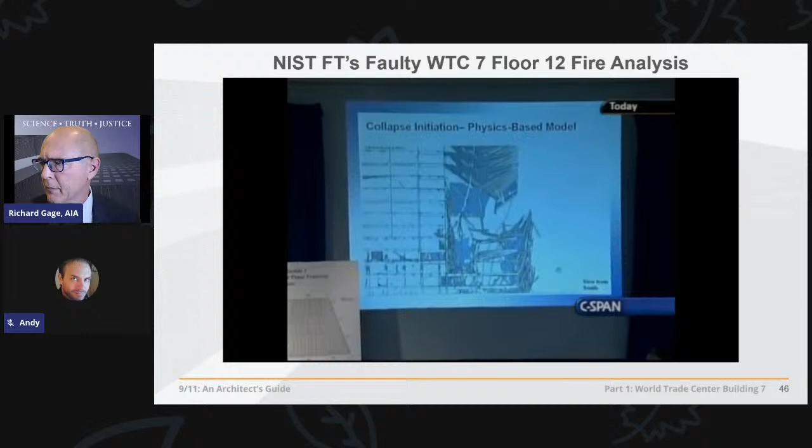All right, so I'll show you this video again here. Come on, there we are. And you can see on the screen, the column at the very right is column 79, and that's the column that first buckles, causing the floors to come down, followed by a quick succession of failures of adjoining columns. Now, all of that is going on the inside of the building. Let's break it down. We have column 79, a massive column, 700 pounds per foot of length on it. This is the floor where their fires are said to have been blazing.

What they said is eventually it caused these beams to expand linearly, pushing this girder off of its seat on this column 79. Then floor 13 falls on floor 12 after that girder falls off, and floor 12 on floor 11, and so on for 9 floors, leaving column 79 unbraced, so that it just buckles, and the entire series of floors fail all the way up to the east penthouse. There are a number of problems with this, but let's take them one by one.

The expanding columns - well, the fires were out here over an hour and a half prior to the collapse of anything, so those fires could not have been expanding these columns at or near the time of the collapse at all. Also, they put into their computer model, in just a second and a half, all of the heat of those fires - 1600 degree fires, something like that they were claiming.

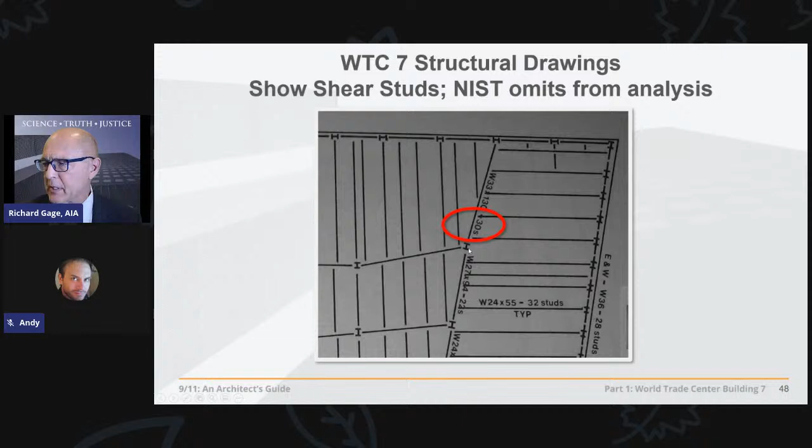We have then the beams breaking their shear studs, which they say were on these beams, but then that pushes the girder off of its seat, because apparently it did not have shear studs, according to NIST. However, the shop drawings show that this girder clearly does have 30 shear studs, so it couldn't have gone anywhere, much less being pushed off of its seat on this column 79 by these beams here, which are 50 feet in length.

But let's say that could have happened, and this girder could have been pushed off of its seat. You see the seat blown up here. NIST says it only had to be pushed halfway off of its seat on this column, because this flange then just had to fold and break. But the problem there is that flange is supported by these 3/4 inch stiffeners, which are welded in place. You see here in elevation and here in plan.

So NIST omits that key structural component, citing that they didn't have to put that stiffener in there because it was only there in order to keep the web from crippling or bending. And that also would have clearly supported the flange on top of that seat from folding. So indeed, that girder would have had to have pushed all the way off of its seat.

Anyway, even if that happened and this girder fell off of its seat, floor 13 couldn't have just fallen on floor 12. There's two other massive girders framing into that column - it would have kept most of that floor intact. And even this section of floor 13 could have fallen, it wouldn't even probably have reached the floor below.

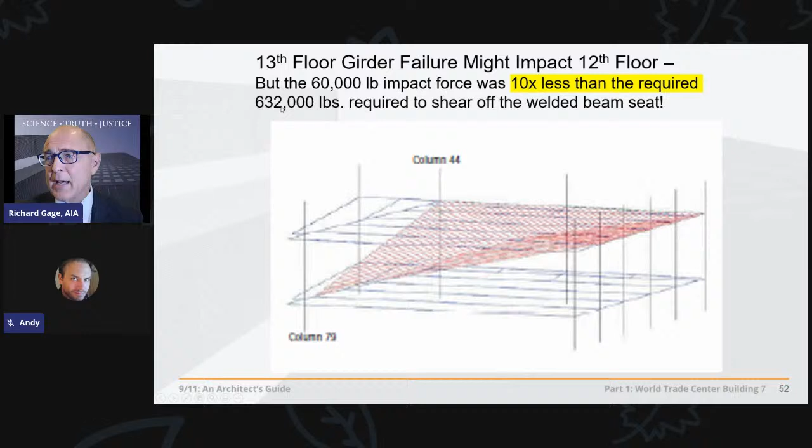Much less had the shear strength to break the shear on that, because it would have taken 10 times the amount of dynamic force to break that connection on the girder connection to the column below. It would have taken 632,000 pounds, but it only had 60,000 pounds.

So this is all extremely important, but let's go further and say that floor could have fallen and that there was this internal cascading failure of these floors per NIST's computer animation. Well, then you would have seen massive breaking up of structural steel framing members on the perimeter.

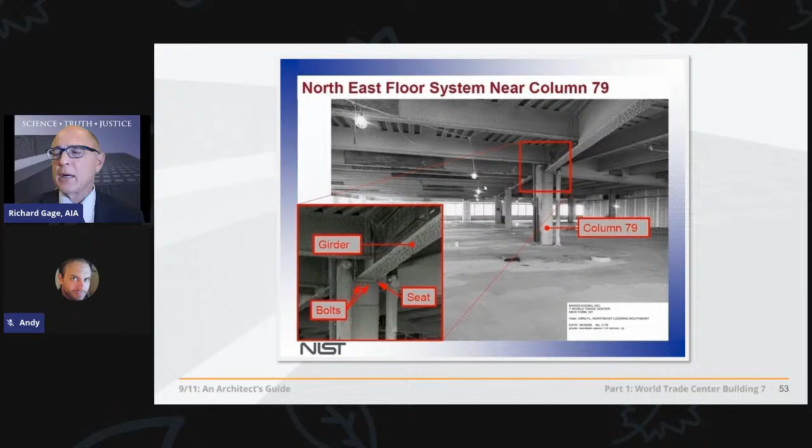And because all of these beams are very carefully designed to be interlocked in this moment-resisting steel frame structure, you would have had breaking up of windows and granite panels on the exterior in an incredible way. It would have been crumpling up like a beer can right here on all of these floors below the east penthouse. But that's not what happens in reality, as you saw in the video.

Why? Well, it begins to tip over. They can't even fake their computer model enough to get it to look like the video. It begins to crumple up on the lower floors, as you'd expect in any structural failure that's involving the lower floors of a high-rise. So we submitted a FOIA request, Freedom of Information Act, which you can do with federal agencies in the U.S.

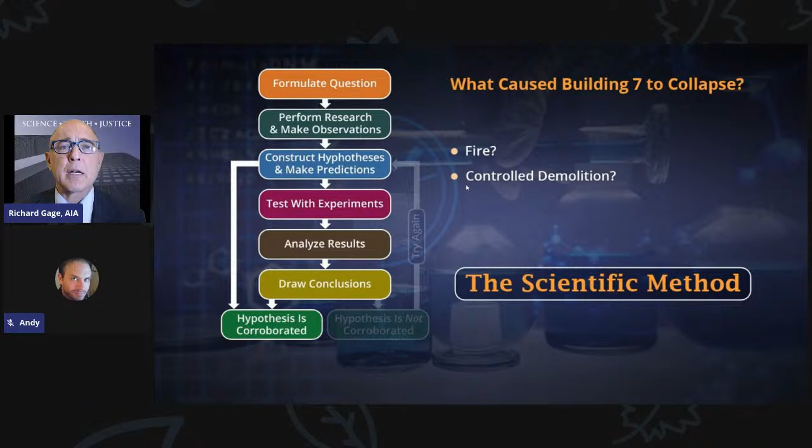If the hypothesis is not corroborated, we go back. We construct a new hypothesis until we have a hypothesis that's corroborated by all the data, the evidence, and so forth. That's what we're about today. That's what we're going to be doing. Let's start with some background research.

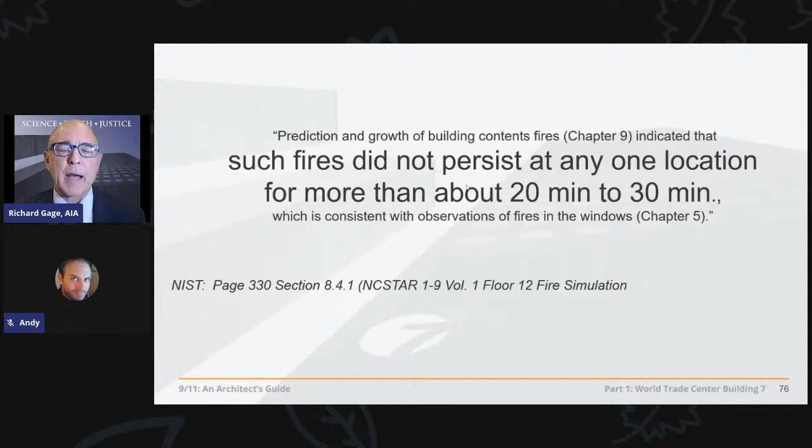Forces that destroy buildings, let's look at them. Fire is certainly one of them. Let's start there. It's an organic, chaotic process. It burns out an area in roughly 20 or 30 minutes and moves on looking for fresh new fuel sources. So even NIST acknowledges that fires can only persist in one location for about 20 to 30 minutes, and fires, by their nature, creep from place to place as they run out of fuel.

But how about that in a wood frame building? Because in wood frame buildings, you'd expect it not to fall straight down through the path of greatest resistance, the thousands of tons of structure, if there's that much there, of cold, hard, intact structure. It wouldn't just go straight down through - it might fall over. How about high rises? How do they act in massive fires?

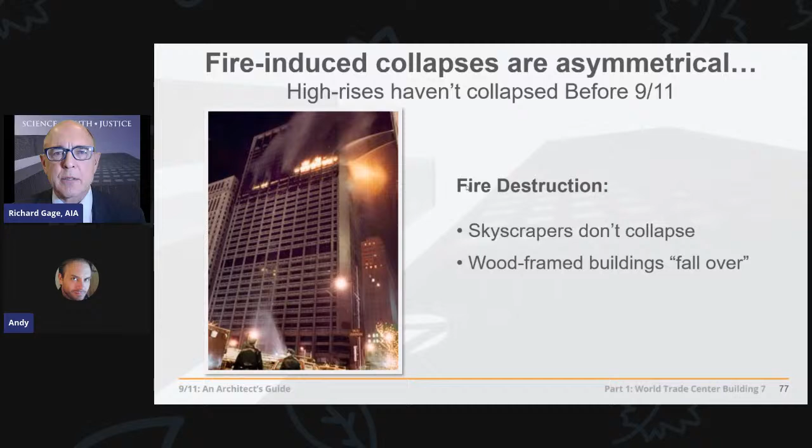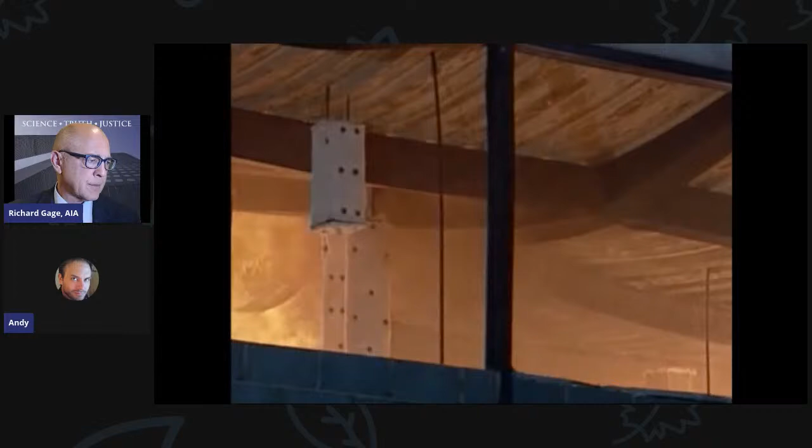It showed how unprotected steel can be distorted even by a normal office fire, but as is typical in steel buildings, the structural beams only slowly and progressively warped and sagged. There was no chance of a sudden collapse.

In over 20 years, I have not seen, until recently, a protected steel structure that has collapsed in a fire. Until recently - of course, he's referring here to 9/11, when we had not 2, but 3 protected steel structures collapse primarily due to fire, and in the case of Building 7, only due to fire.

But what happens with the connections? They remain intact - that's the strongest part of the building. The connections don't fail, the beams can sag. In this case, unprotected beams can sag or warp. They say in the executive summary, it's inherently stable due to the highly redundant nature of the structural steel form.

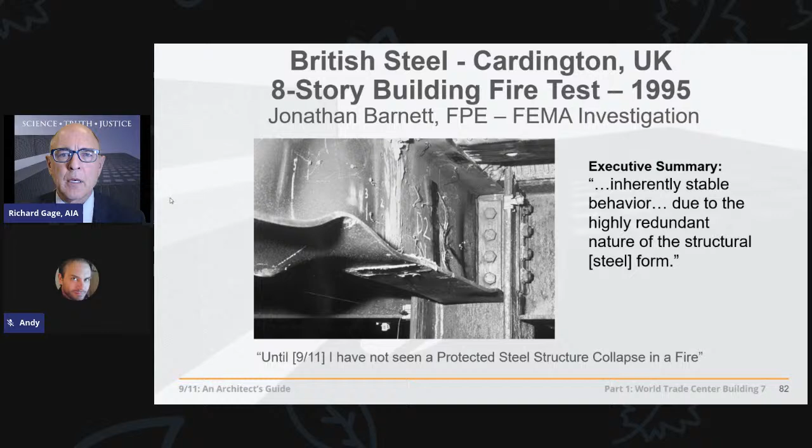Well, we've had almost 100 very hot, large, and long-lasting fires in skyscrapers in the US. Let's take a look at a couple of them.

May 4th, 1988, the First Interstate Bank, a 62-story building in Los Angeles, California, suffered a 3.5-hour fire which burned across 5 floors and caused an estimated $200 million of damage.

It did not collapse. February 23rd, 1991, the One Meridian Plaza, a 38-story building in Philadelphia, suffered an 18-hour fire which burned across 8 floors. The fire caused an estimated $100 million worth of damage and 3 firefighters died fighting it. It was later described by officials as the most significant fire of the century.

It did not collapse. October 17, 2004, the East Tower of the Park Central complex in Caracas, Venezuela, suffered a 17-hour fire which spread across 26 of its 56 floors. It did not collapse.

August 18, 2007, a fire broke out on the 17th floor of the Deutsche Bank building in New York, a building undergoing deconstruction after being heavily damaged by debris from the South Tower on 9/11. Originally 41 stories in height, it had been reduced to 26 at the time of the fire, which lasted 7 hours and affected a total of 10 floors. 2 firefighters died of smoke inhalation.

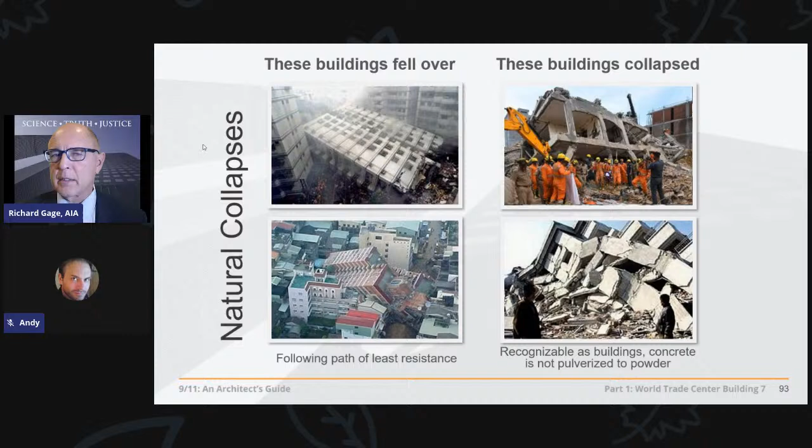The columns and the beams are not severed one from another. So remember that, because this is the kind of features that differ distinctly with the features of the collapse of buildings 1, 2, and 7. We're talking about 7 today. We have thick, billowing, enormous pyroclastic-like smoke in buildings that are exploded. The third category of failures here.

And we have sounds of explosions that are heard by witnesses, flashes of light that are seen by them. The explosions, due to the incredible hot gases, expand rapidly in cauliflower-shaped formation, and that's not typical even in buildings that fall over whatsoever, or buildings that are just on fire.

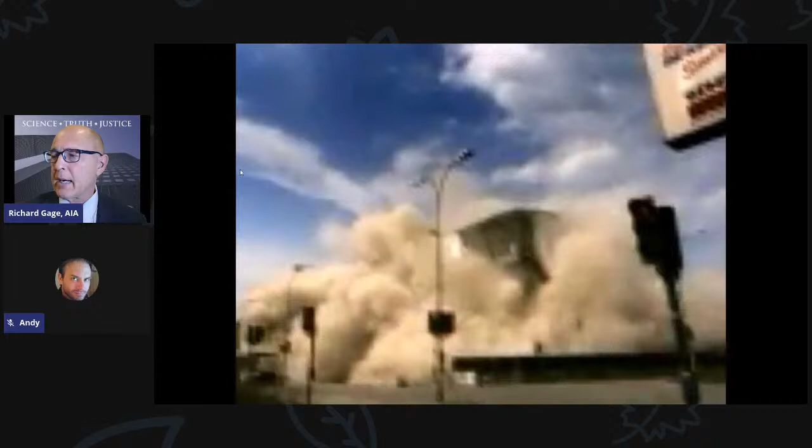And it's actually not true in most typical controlled demolitions. As you see here in these examples, there's a lot of dust because the concrete is broken up, and the gypsum board it's pulverized by lots of these explosions. But it's not this thick, billowing, rapidly expanding cauliflower-shaped forms, almost like in a volcano, which we'll be looking at a couple of examples of.

So they do this by placing shaped cutter charges at the column and beam connections throughout the building, and they set them off in a very precise order to bring the building down how they want.

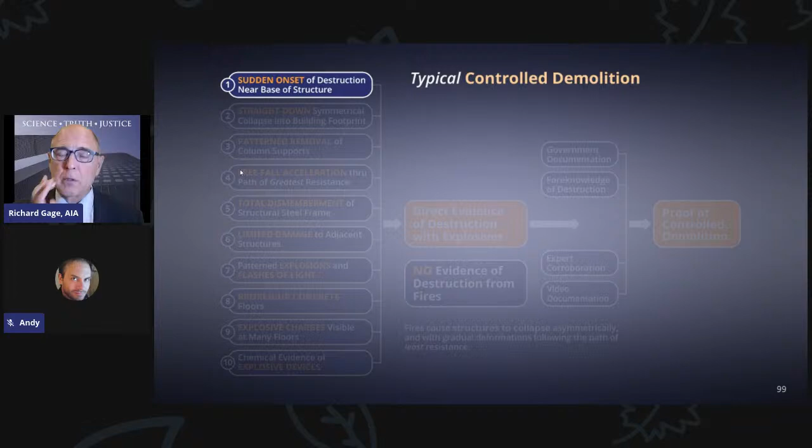There's a set of features associated with these controlled demolitions. There's a sudden onset of destruction. It doesn't begin to creak and groan and fall over. It's sudden, and it's straight down, symmetrical into its own footprint.

Feature number three, there's a patterned set of explosions. That's what causes feature number four, a free fall acceleration straight down through what was the path of greatest resistance, the thousands of tons of structure underneath, but which has been compromised by these explosions advancing ahead of the collapse, resulting in the total dismemberment of the structural steel frame.

So that is a key feature. They don't want to have to go back and break it up afterwards. They want to break up as much of it as they can, but at the same time cause as little damage to adjacent buildings as possible.

And then patterned explosions heard by witnesses. That's what we have here in the controlled demolition industry. Flashes of light seen by them.

The concrete floors are broken up. They don't want to have to go back and jackhammer those floors at all odd angles, one at a time. Extremely dangerous work. Let the explosives do that work. And so those explosions are visible at many of the floors as a result.

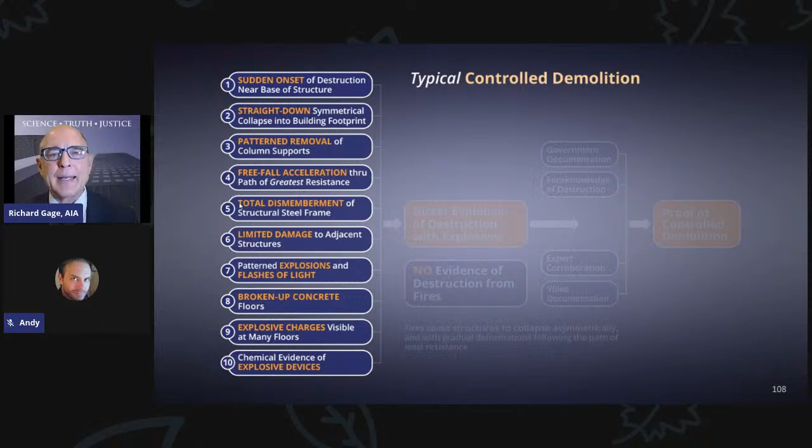And it leaves behind chemical evidence of explosive devices. If you have these features, you have explosive evidence of destruction, and evidence of explosive destruction. These features are not created by fire, let alone all of them. If you have all these features, you can be pretty sure that was a controlled demolition.

Fires cause less robust structures to collapse, but asymmetrically, following the path of least resistance, with gradual deformations.

With additional evidence, corroborative evidence, circumstantial evidence, like government documentation, that can be very, very helpful in determining what's a controlled demolition. You don't just go into a burning building and set these charges in an afternoon. It takes months and approvals. And so there's foreknowledge of the destruction.

Experts agreeing, at least those experts without financial or political obligations that might sway their objective opinion on whether something is a controlled demolition, along with video evidence we'll be looking at today, this is proof of controlled demolition, or can be. And such proof we're going to apply to Building 7 at this time. So let's get into it.

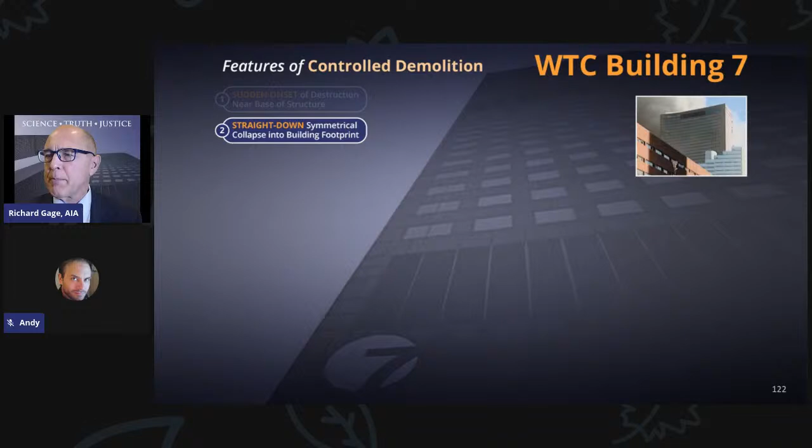Straight down, symmetrical collapse into the building's footprint. Is that what we have? Let's take a look from West Street. Pretty straight down, pretty symmetrical.

Also, you'll note the east penthouse is already collapsed. It was on the left side. And you also notice that half a second prior to the overall collapse of this building, the entire screen wall and west penthouse on the right falls down into the building, indicating that the structure beneath it failed virtually all at once.

Well, wait. NIST's theory is that after the east penthouse failed, that collapse went from left to right in 6 seconds, east to west. So we should have seen a gradual failure across this football field size building.

But they collapse all at once, completely pulling out yet again the rug from NIST, who claims that this was a gradual failure, instability from left to right.

And yes, it falls mostly into its own footprint, indicating, because the center of the pile is in the center of the building's footprint, that this was a symmetrical collapse. And maybe we're not quite sure yet.

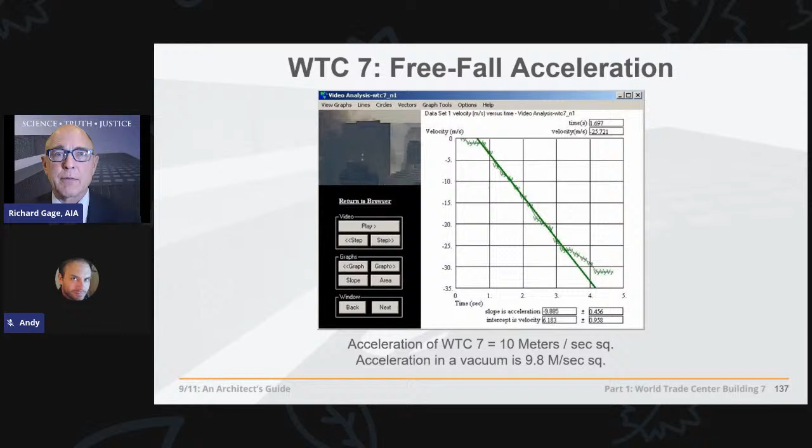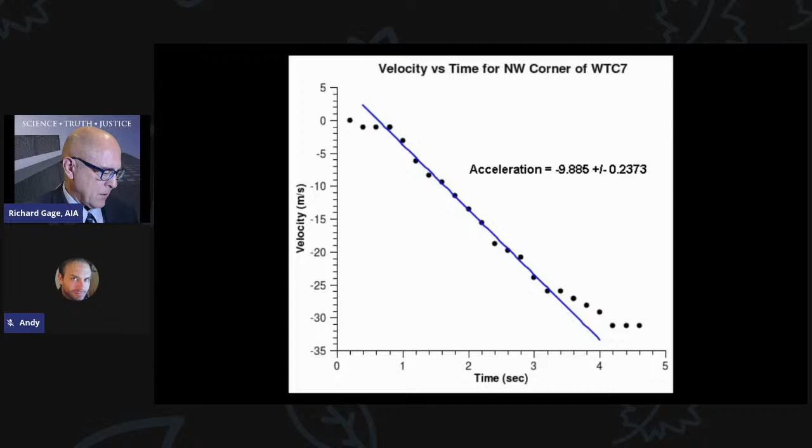How fast is the building coming down? Let's go to physics teacher David Chandler, who has a little physics lesson for us, high school physics. Just by watching it, anybody can see that building 7 fell close to free fall. To measure it, I used software to track the corner of the building and compute a graph of downward velocity as a function of time. The graph had a long, straight section indicating constant acceleration. Measuring the slope, I found the acceleration to be within 1% of the acceleration of gravity for the first 2.5 seconds. In other words, the building fell through its own structure with zero resistance.

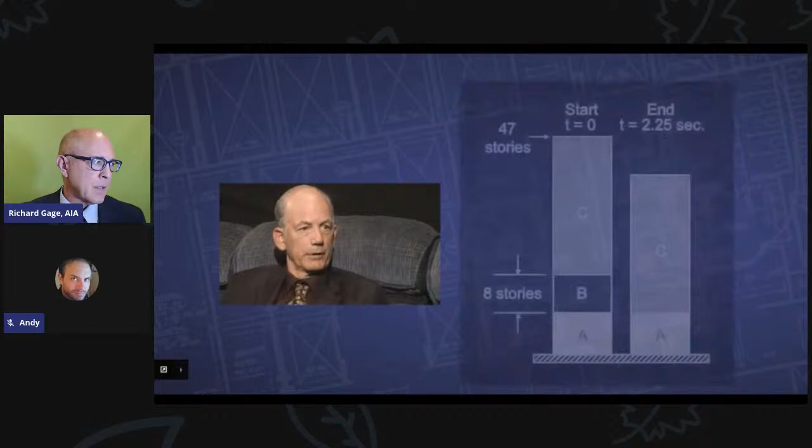Well, let's talk to some structural engineers about a building falling through its structure with zero resistance. This building had 40,000 tons of structural steel in its structural system, and that is intended to keep it from going anywhere. NIST is telling us that the building below it ceased to exist for the first few seconds of the collapse of the building.

Well, things in physics just don't cease to exist and cease to resist the forces that are on them. The building didn't disappear, so the building can't fall for 100 feet at free fall speed. That's impossible. That's a violation of the fundamental law of physics that says that for every action, there's an equal and opposite.

There is an equal and opposite reaction, and let's look at it. We have it over here. Reaction.

Hang on one second, I'll be right back. There we go. Oh man, place is falling apart today. Sometimes the green screen fails, and when it does, I have to set up a whole new background. Anyway,

Even when columns are buckled, they still provide resistance. 25% of their capacity remains intact even after they're buckled 90 degrees. So that means it's impossible for the building to fall at free fall speed, indicating not one of those columns gave any resistance.

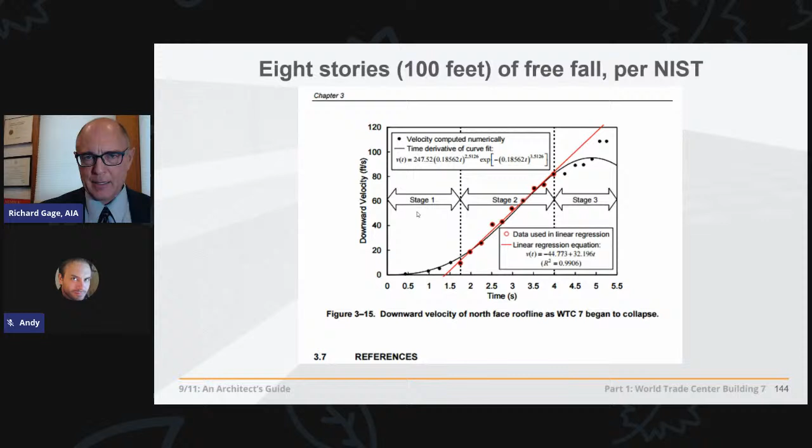Oh, NIST, in their infinite wisdom, says, oh, well, finally they admit that it did come down at free fall, but they simply say this is consistent with their existing results. Well, they were forced to admit free fall by members of AE 911 Truth who publicly embarrassed them into the reality that this is easily measurable.

Let's go on. Feature number 5. Is the structural system totally dismembered? Yeah, it falls like a house of cards. Every column from every beam has been completely severed. It's a moment resisting steel frame structure that has fallen like a house of cards.

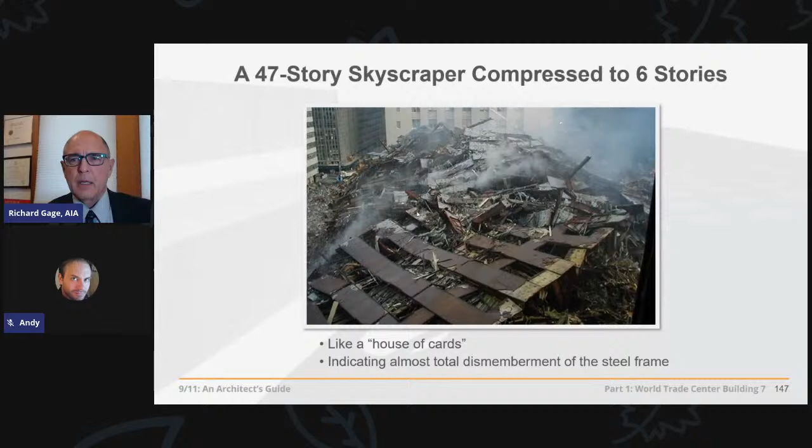The columns and beams are very rigidly welded to each other. They don't just break off like that. Remember, buildings that collapse due to natural causes, the columns and beams are not severed one from another.

The building is recognizable as a building, semi-intact at least. Do we have limited damage to adjacent structures? Yes, there's some damage to the post office across the street, but the center of the pile is in the center of the building's footprint.

Do we have sounds of explosions that are heard by witnesses? Let's go to Shyam Sunder first. We did not find any evidence that explosives were used in the collapse of Building 7. We ran down detailed computer simulations of blast scenarios. This size blast would have produced an incredibly loud sound that was not recorded on videos of the collapse, nor reported by witnesses.

No? Well, let's look at a couple of them. We were watching the building actually because it was on fire.

The bottom floors of the building were on fire, and we heard this sound that sounded like a clap of thunder. Turned around, we were shocked to see that it looked like there was a shock wave ripping through the building, and the windows all busted out. Then, it was horrifying.

And then, about a second later, the bottom floor caves out, and the building followed after that. We saw the building crash down all the way to the ground. A shock wave ripping through the building, the windows busting out. What does that sound like to you?

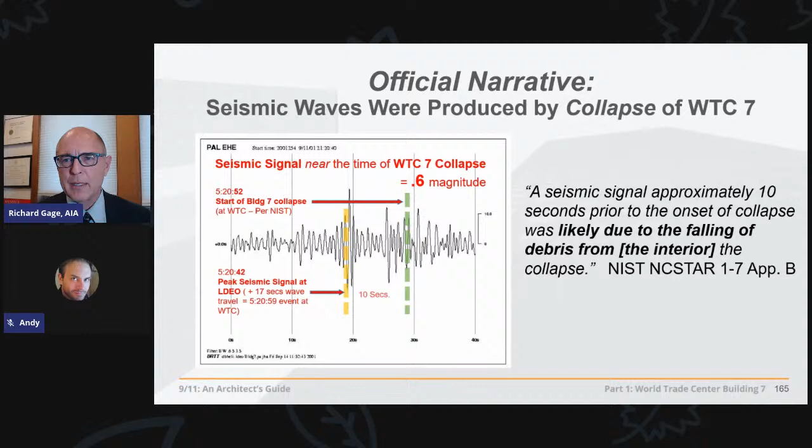Well, NIST has a way of making sense out of this. They say it's likely due to the falling of debris from the inside of the building. Well, that's only 10 seconds before, as you can see here. They're saying that's the falling of debris right now by that east penthouse, without any telegraphing, and the exterior perimeter structural steel system breaking up granite panels.

So 10 seconds before the overall collapse here, they're saying that signal, that peak signal, was caused by internal debris hitting the ground. And then virtually no seismic signals after that, not of that magnitude.

So Andre Rousseau comes into the picture in 2009 and 2012. We have this applied geophysics expert, author of more than 50 published papers on propagation of mechanical waves and geology. What does he say? Because he looks at this very carefully.

He says, gosh, the bell-like form points to an impulsive source of energy, not percussion on the ground due to the falling of debris. The seismic waves are only created by brief impulses, low frequencies. These undeniably have an explosive origin.

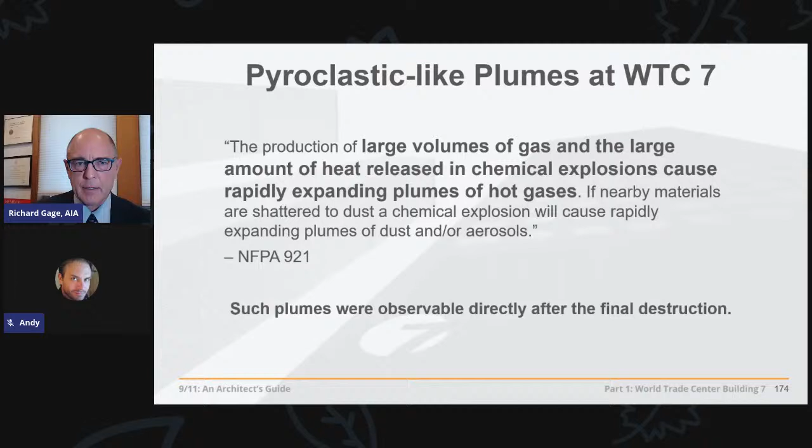So what I'm going to have to do is get my screen back so I can see what you're seeing. We're going to jump back to slide 174 and the slideshow there. Bring it back now from here. And there we go. So let's look and see if that's indeed what we have here.

Racing away from every direction from Building 7 at 35 miles an hour, these rapidly expanding plumes of hot gases - where is all that heat coming from? This is an incredible quantity of heat, and surely those few small and scattered fires in this building were extinguished by the kinetic energy of the building collapsing. We're talking about an order of this kind of heat. Where does that kind of heat come from?

Well, let's look into it, because we do find it. In fact, NASA finds it first from their infrared sensitive cameras. They're discovering heat on the surface of the pile, 1,340 degrees Fahrenheit. That's hotter than most office fires ever get, and yet surely those fires were extinguished, and there's no fire on the surface. So this must be evidence of something much hotter deep down in the pile that is radiating up to the surface and cooling off by the time it gets to the surface to 1,340 degrees Fahrenheit, which is hotter than most office fires get.

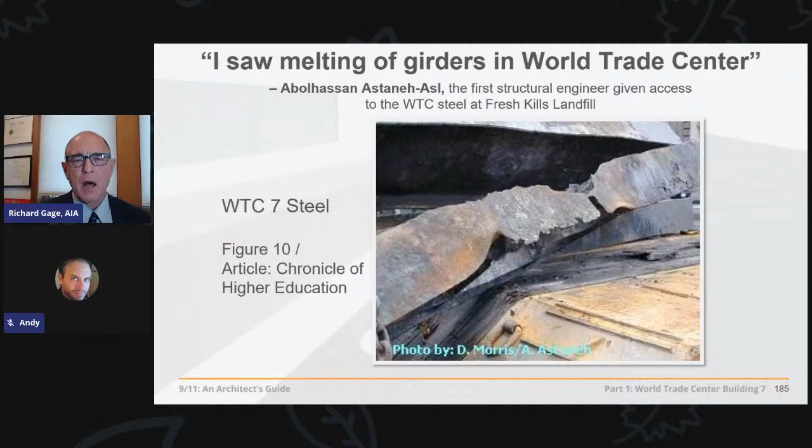So let's get into who's studying this steel. Here's structural engineer Abolhassan Astaneh-Asl. What does he say? 'I saw melting of girders, I saw melting of girders in World Trade Center.' Well wait a minute, girders don't melt in office fires. It takes 2,800 degrees to melt girders. These office fires were surely only 300 or 400 or 500 degrees. NIST claims 1,500 degrees - clearly that's less than half, or about half, of the temperatures required to cause this kind of melting on this piece of steel from World Trade Center 7.

What does FEMA report author Jonathan Barnett say about the steel members in the debris pile that appear to have been partly evaporated in extraordinarily high temperatures? He has no idea how that happened. It takes 4,000 degrees, by the way, to evaporate steel. What can do that?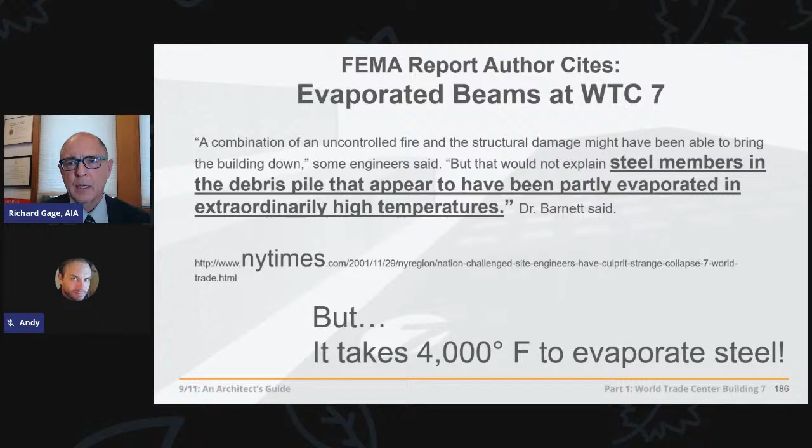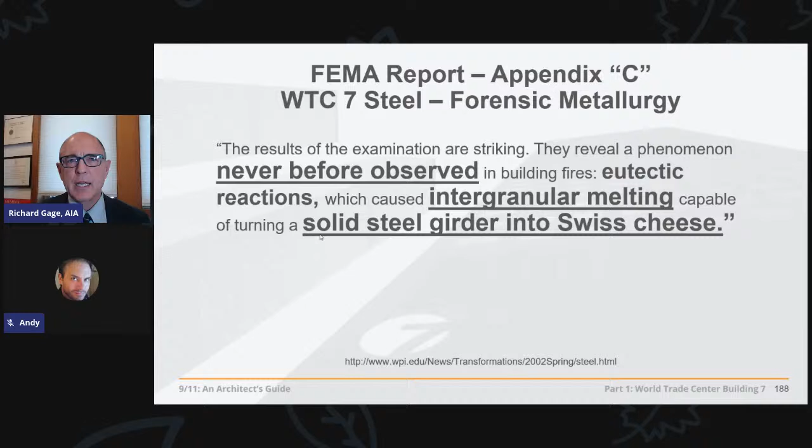Rapid oxidation, sulfidation - where did the sulfur come from? Liquid iron, that's molten iron. Iron doesn't even begin to melt until 2,800 degrees Fahrenheit. Sulfur formed during this hot corrosion attack on the steel.

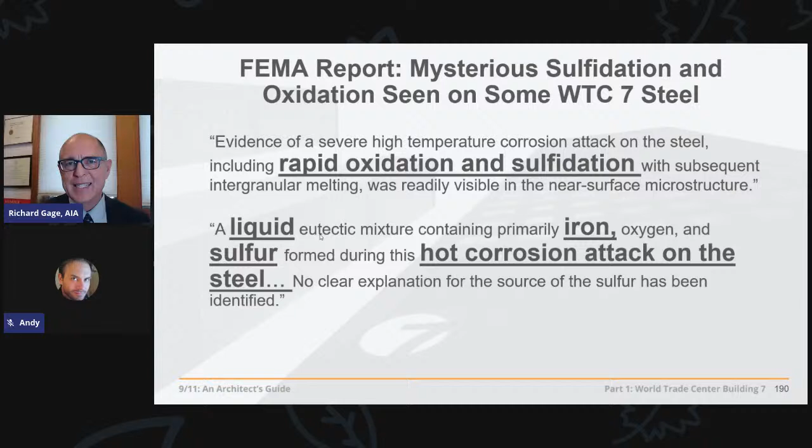Yet this information was completely eliminated from the NIST report when they took over in 2002, producing their own sanitized report, which we'll get into.

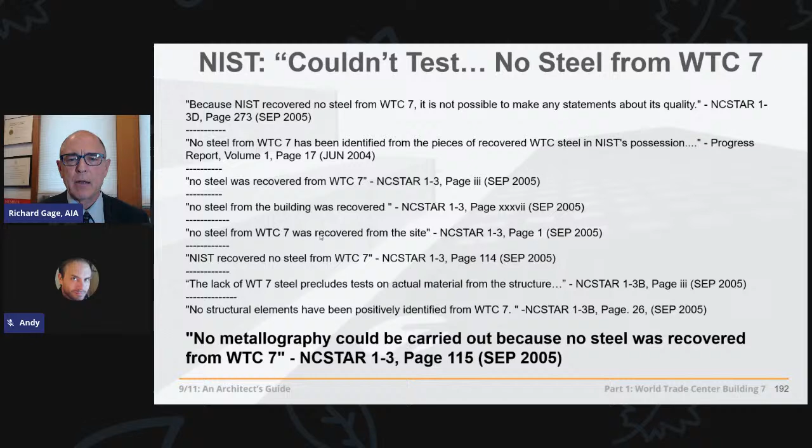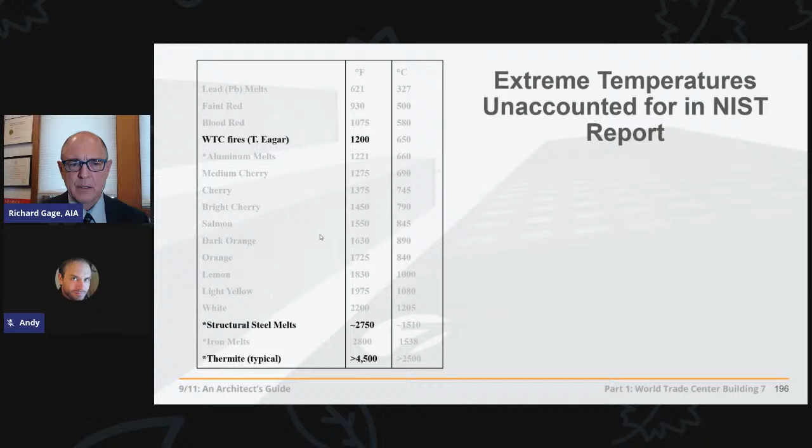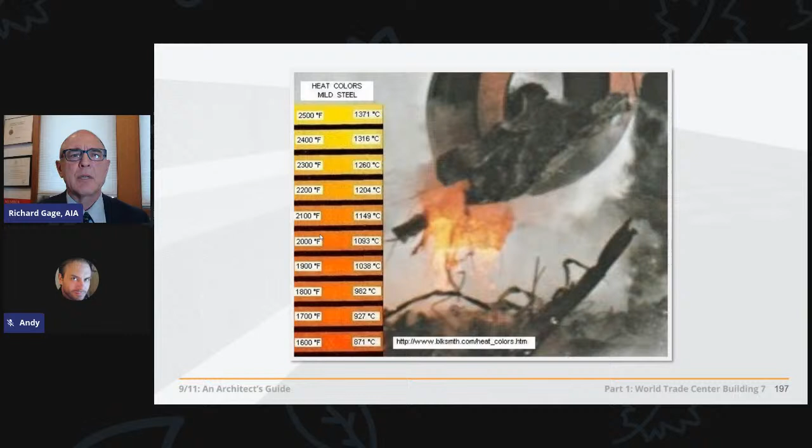The fires are maybe 1,200 degrees according to Thomas Eagar, but steel doesn't melt till almost 2,800 degrees. What could produce that? Well, buildings are hydrocarbons - they can only get to be about 600 to 1,400 degrees. Even jet fuel doesn't burn any hotter than that, according to its manufacturer. But there's no jet fuel at Building 7, right? Yet steel had definitely melted. In fact, you can see by the color of the material held in the hands of this crab claw excavator, the dripping molten white and yellow tells us, because of the physics of molten iron and steel, that it is 2,500 degrees.

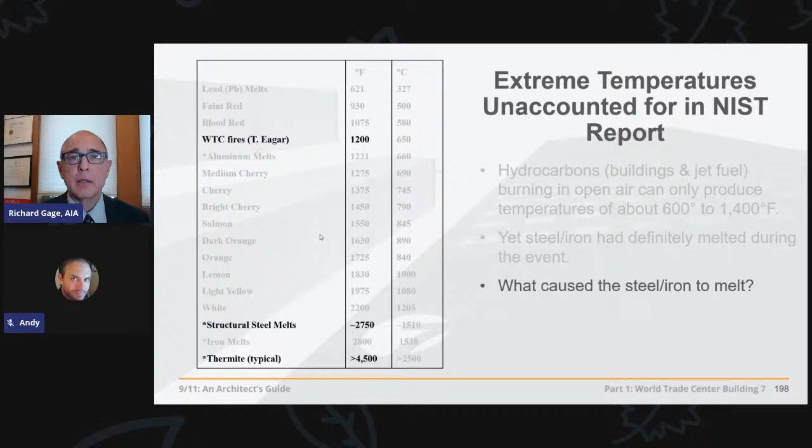What caused it to melt? Let's look at one reasonable hypothesis, which is thermite. As we look for forensic evidence of incendiaries here, could thermite have produced all that molten metal?

Well, what is thermite anyway? An incendiary used by the military, thermite is a compound of iron oxide and aluminum, which when ignited sustains an extreme heat reaction, creating molten iron. In just 2 seconds, thermite can reach temperatures over 4,500 degrees Fahrenheit, quite enough to liquefy steel.

We know that open-air fires cannot burn hot enough to melt steel, but metal had melted at the base of the towers. Appendix C of the FEMA report describes sulfur residues on the World Trade Center steel. The New York Times called this the deepest mystery of all. Sulfur slightly lowers the melting point of iron, and iron oxide and iron sulfide had formed on the surface of the structural steel. Sulfur used with thermite is called thermate, producing even faster results.

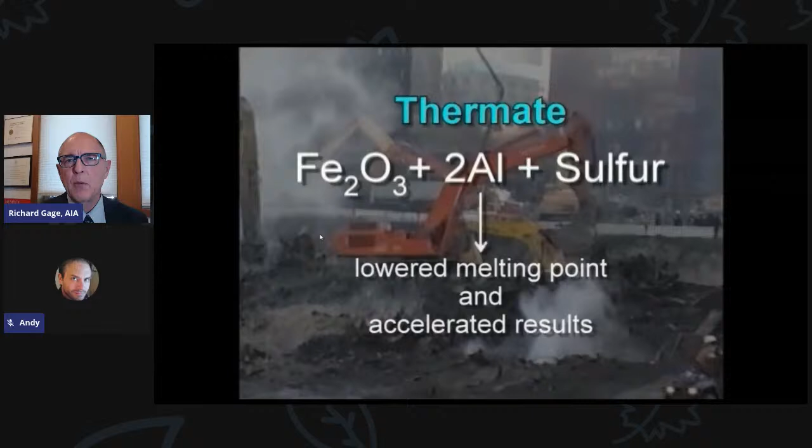Maybe we're getting somewhere here, because if thermite were used, then it would explain the presence of 4,000 degree heat, because that's what it produces. It would explain the presence of sulfur, because sulfur is added to thermite to become thermate, much more effective at cutting through steel. And it would explain the presence of molten iron, elemental iron that's been melted.

This is not steel that's been melted, interestingly enough. We haven't used elemental iron in our skyscrapers for 100 years. Where did the iron come from? We're going to see there's an awful lot of it in a moment.

The National Fire Protection Guide 921 says, look for unusual residues that could arise from thermite or other pyrotechnic materials. NIST says, we found no corroborating evidence to suggest that explosives were used. Later, a year later, they admit in writing, NIST did not test for the presence of explosive residue. You can't find what you won't look for, but others did.

One of them, Steven Jones, a nuclear physicist formerly from Brigham Young University, is sent a sample from this particular sculpture in the Peace Park in Manitoba. One of the things he notes is that this is a highly irregular cut through here. This isn't the kind of cut that they do with oxyacetylene torches and thermal lances.

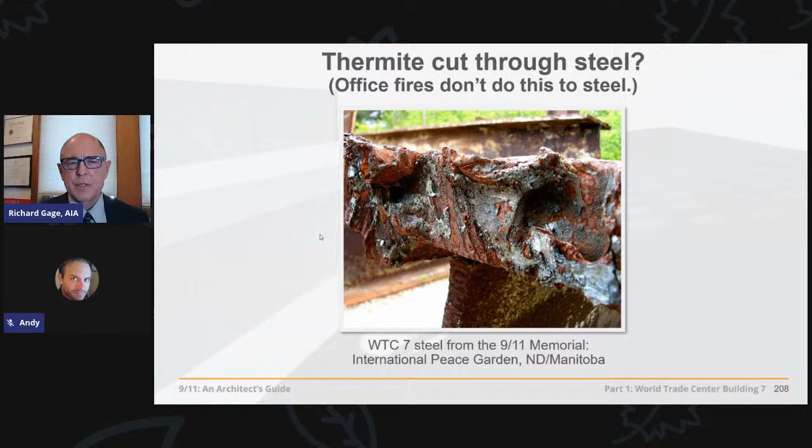So he takes a sample of this slag and he does X-ray energy dispersive spectroscopy and finds what? We have iron, key ingredient of thermite. Aluminum, key ingredient of thermite. And manganese, which becomes very important. And sulfur - again, there's that sulfur that nobody could identify from official sources.

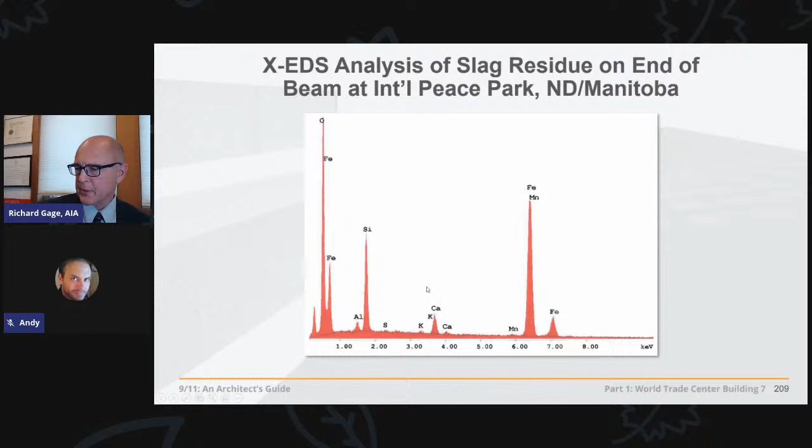Potassium. And we have some other studies that have been done by the U.S. Geological Survey - USGS. And all the dust samples, hundreds of them, they get very, very clear results from what's in them in their report in 2005.

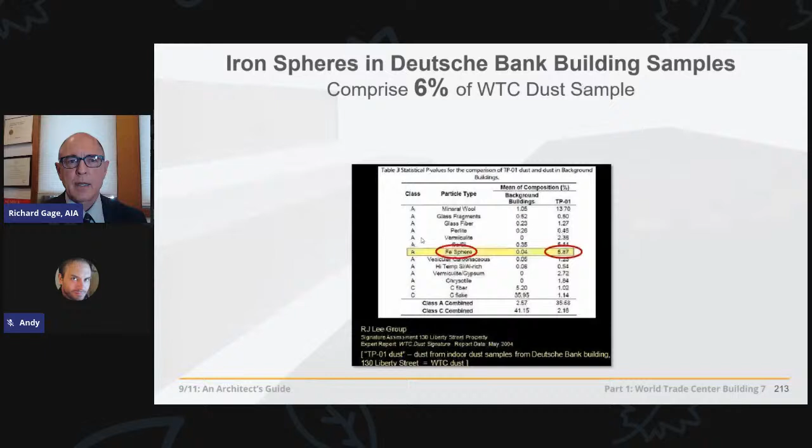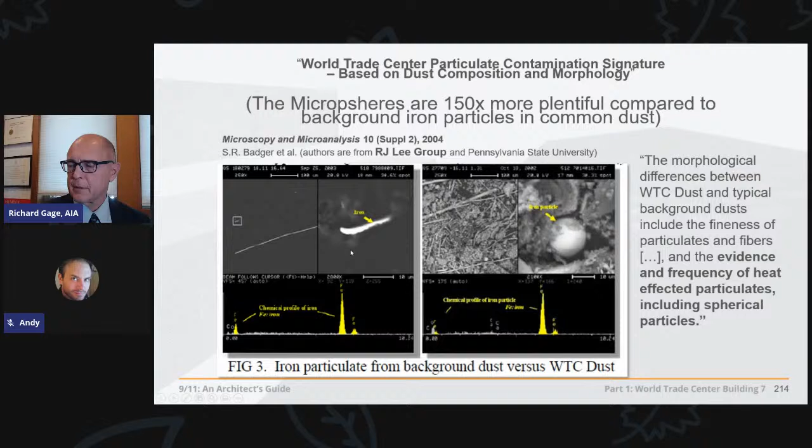They find billions of what? Previously molten iron microspheres. We're going to unpack that because they don't know where they came from. They have no idea. But all the dust samples have them. Up to 6% of these dust samples are composed of these iron spheres that they have no idea where they came from. There's up to 4 tons of this material in the dust - 150 times the background level of iron, which can be in common dust.

R.J. Lee Group finds them - an independent, private, environmental consulting firm. They said they're formed during the event, not before by the welders, not after by the iron workers taking apart the steel. Well, there's so many of them and they're so ubiquitous that the EPA designated them as a distinguishing element, a signature component to confirm what is World Trade Center dust and what is not.

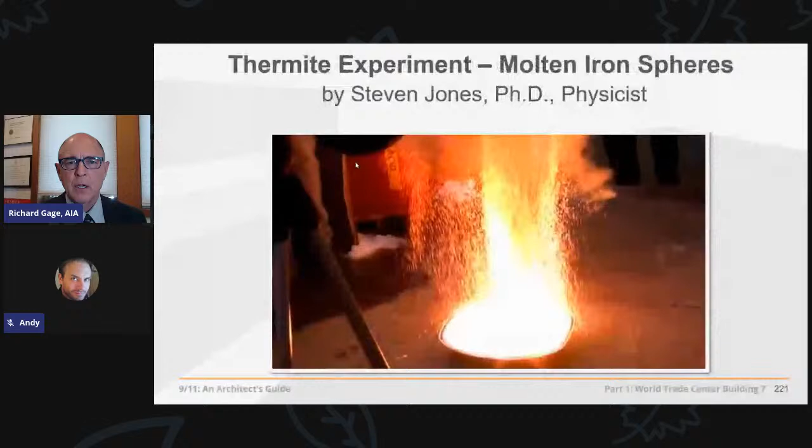Well, how would you make iron microspheres? Here's a thermite experiment under controlled conditions, a small one, where you see thousands of sparks - slowing it down halfway. What they look like is sparks, but they're liquid molten iron, which is what thermite issues under pressure, and that would form itself into spheres because aerosolized liquids do that due to their surface tension.

You can make thermite in your backyard, by the way. You could buy it on eBay. It's just iron oxide and aluminum powder. Iron oxide is basically rust and fine aluminum powders. Here's Jon Cole's experiment.

Don't try this at home. But if you do want to get into it, you'll find that there are much cleaner, more sophisticated devices that can cut through much thicker sections of structural steel more effectively.

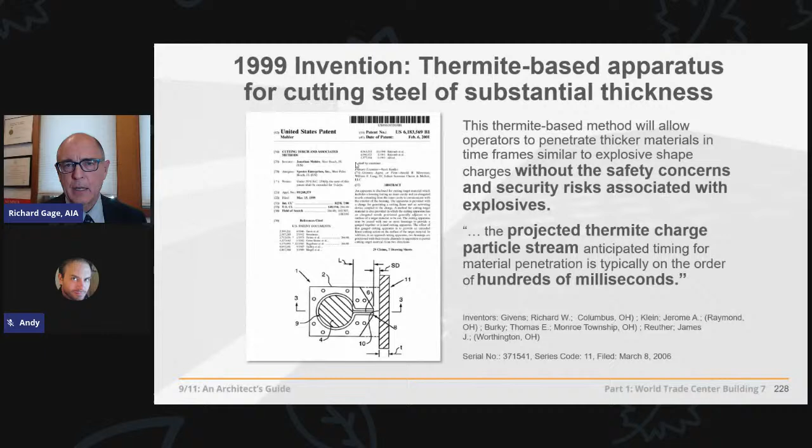And there are devices patented prior to 9/11 whose casings themselves are made up of consolidated thermite, which is consumed, but that would leave molten iron pools around for everybody to see.

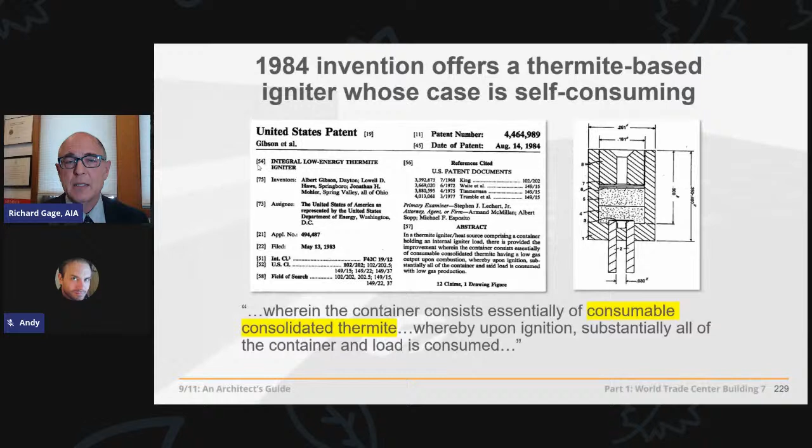And that's what we'll be showing you in week 3, part 3 of this 3-week series, 9/11 An Architect's Guide. This is just part 1.

But what else was found in the World Trade Center dust? Let's look into it, because a team of 8 international scientists led by Niels Harrit in Copenhagen collected samples from all over the place, including samples given to them because people had heard about their work.

Janette MacKinlay, for instance, collected some of the dust from her apartment across the street from the South Tower. This dust was blown into her apartment. All the windows were blown out in the building she was in. And she collected it. She was an artist, and she actually worked with it to make art projects, and ended up dying tragically of brain cancer several years later. She paid for that dearly, but one of these samples is hers.

These are red-gray chips, red on one side, gray on the other, which are found in all the World Trade Center samples that they collected. There's, by extrapolation, about 10 tons of this material in the World Trade Center dust.

They get real curious because it's attracted by a magnet, so it's not paint. And it's dual layered, red and gray. So it seems obvious that it was applied in a fluid such as paint. But they zoom in, and what do they find in the red layer? Iron oxide and aluminum powders, along with silica, oxygen, carbon, which we'll come back to.

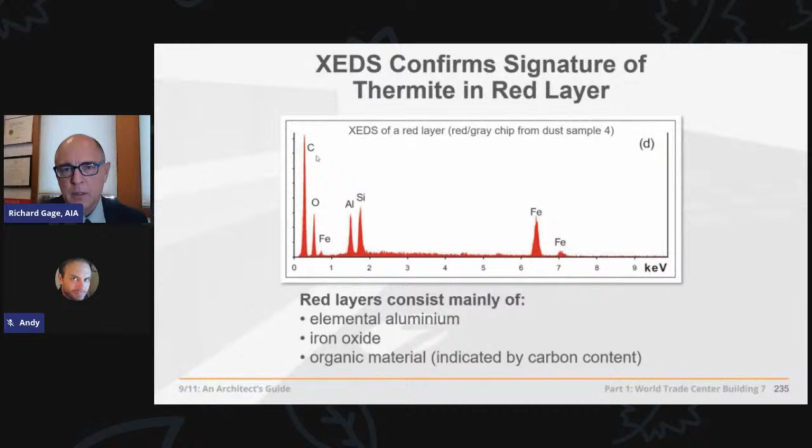So they get real curious. What are the ingredients of thermite doing in these red-gray chips? They zoom in 50,000 times with an electron microscope and discover nano-sized particles of iron oxide rhomboidal-shaped crystals and aluminum platelets. They're 1,000 times smaller than the diameter of a human hair. And they're set in a bed of oxygen, silica, carbon, organic materials.

Well, organic materials is what's used to expand and provide the incredible concussive force that's characteristic of TNT, RDX, C4, high energy explosives. So something very interesting is going on here.

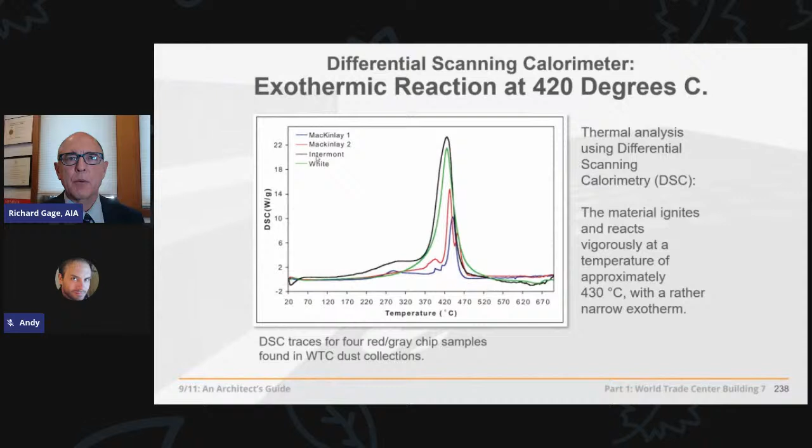Well, they put it in a heater, a differential scanning calorimeter, and it produces all this energy when it reaches about 430 degrees centigrade. And so they confirm that it's an exothermic reaction, which is what thermite does.

They also confirm that iron spheres are produced when they set them off in this heater, with the same chemical signature as the iron spheres produced in the World Trade Center dust. So you see, we know where these iron spheres came from that are throughout the World Trade Center dust.

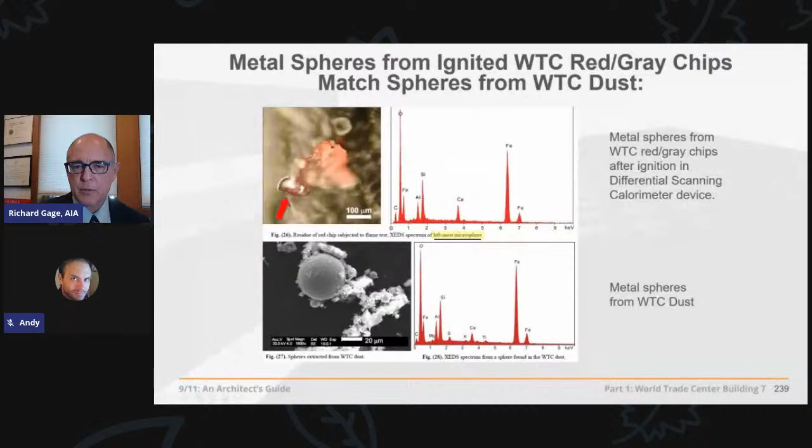As if we didn't know, they're found attached to partially ignited red-gray chips found in the World Trade Center samples, as you see here and here. So this is a self-corroborating, reproducible set of experimental data that can be used in a court of law to bring the real perpetrators of 9/11 to justice.

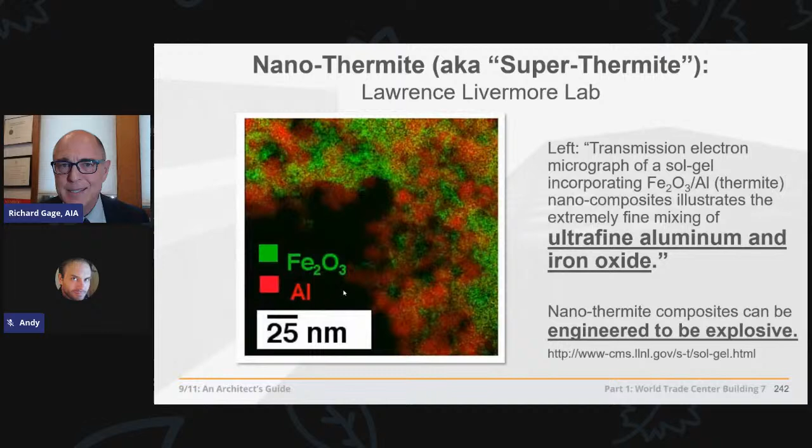So this is not made in a cave in Afghanistan. This is extremely sophisticated material. When you bring down to the nano scale these particles, the chemical reaction is virtually instantaneous. So you've turned, or engineered, an incendiary, which works by means of heat, to become more explosive.

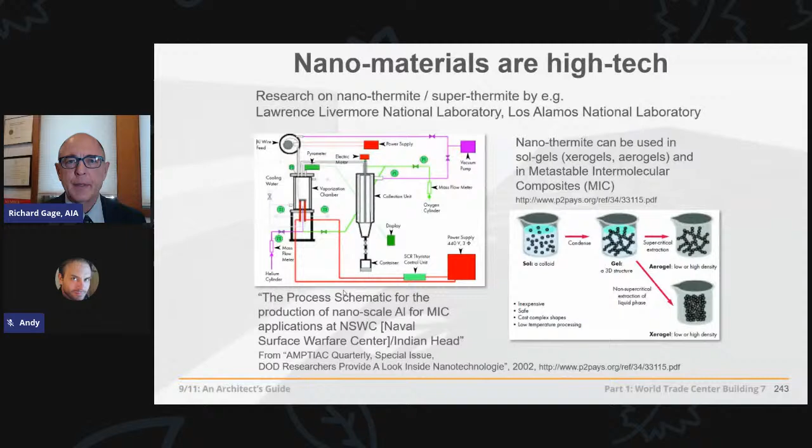It's not made by people who don't really know what they're doing. And it's not difficult to find the people that do. This is documented in a 25-page peer-reviewed paper in the Bentham Open Chemical Physics Journal.

The red layer is unreacted thermitic material incorporating nanotechnology. It's a highly energetic pyrotechnic material. This paper stands uncontested in the peer-reviewed literature.

The way to contest somebody's conspiracy theory, if you will, is to produce a paper of your own documenting what you believe to be the truth. And this has not been done, not for 10 years, since 2009. So what we've been looking at is direct evidence of destruction with explosives.

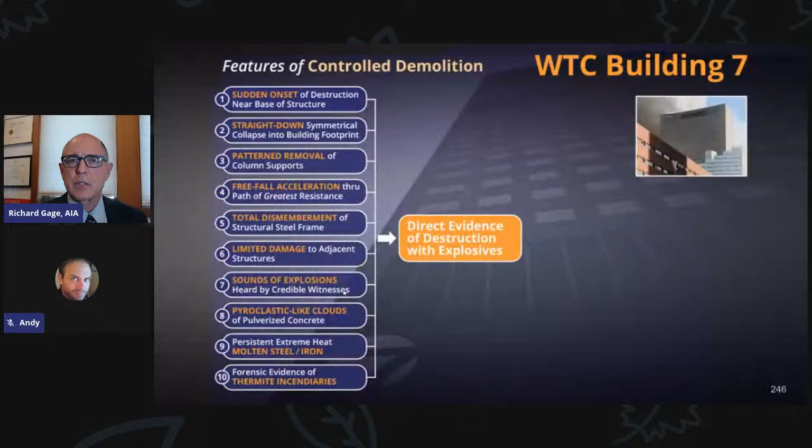A fire doesn't create these features, any of them, let alone all of them. With additional circumstantial corroborative testimony, which we'll be looking at.

Let's look at these fires first. Experts said no modern steel frame reinforced high-rise has ever collapsed due to an uncontrolled fire. Why did this one collapse? Well, we've kind of shown that, right?

But in terms of the actual fires in Building 7, the reason that we don't lose these skyscrapers is because the steel conducts that heat away. It's very conductive from its source, so the source never really gets to 1200 degrees, which is the temperature steel can begin to sag. It loses half of its strength at that temperature.

We don't want that to happen, so we fireproof the steel. And the steel in Building 7 was indeed fireproofed to code, providing 2 and 3 hour fire protection, which is 6 times the amount of protection it needs, because as NIST even acknowledged, fires only burn in one area for 20 to 30 minutes. They move on looking for a new fuel source.

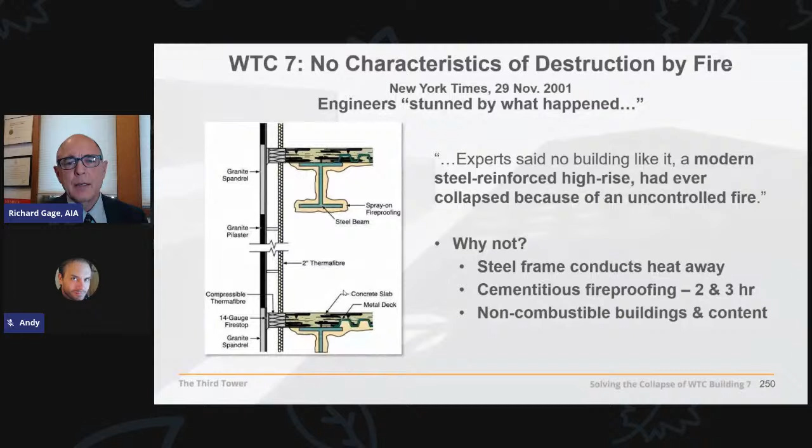So we also keep the tenants from bringing in huge fuel loads for the fire. You only have desks and chairs and rugs, paper. We don't allow contractors to build the high rises out of combustible materials in this country anyway.

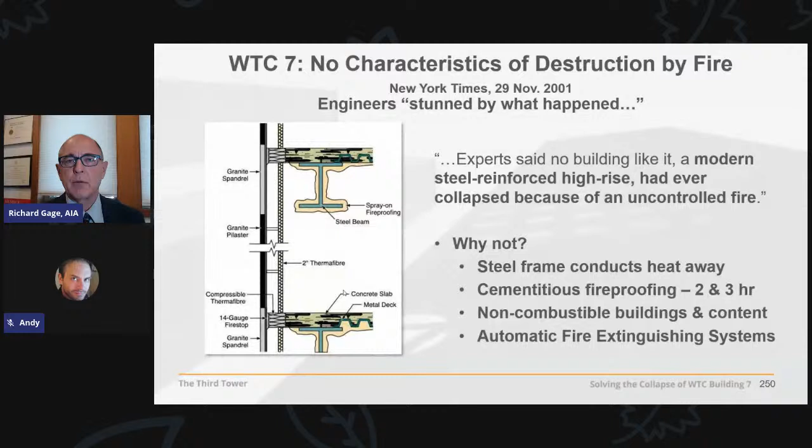And just to keep all that from becoming a problem, we put up fire extinguishing systems, which were put on test mode, as acknowledged by NIST, before 9/11. So they weren't even ever able to extinguish the fires that were in there. And even so, those fires did not get out of control.

As we'll go into some detail next week.

There were investigations into the collapse of Building 7. FEMA came along first with volunteers and finally got $600,000 worth of funding. Their efforts were hampered quite a bit, according to the New York Times. They couldn't get access to the blueprints, couldn't get access to the site, couldn't get access to the steel in any appreciable measure, nor could the public get photos and videos.

So along comes 2008, NIST's final report, and they launched their investigation with the stated conclusion that fires caused the collapse in 2002. So they weren't looking to what caused the collapse, even though FEMA had doubts about what really caused it. And they admit in 2006, we've had trouble getting a handle on Building 7.

FEMA produced the report that we looked at. What was their conclusion? Further research, investigation, and analysis are needed to resolve this issue. Hold on one second.

So surely we have preserved, in easily the most puzzling structural failure in modern history, Building 7. The evidence was preserved. No.

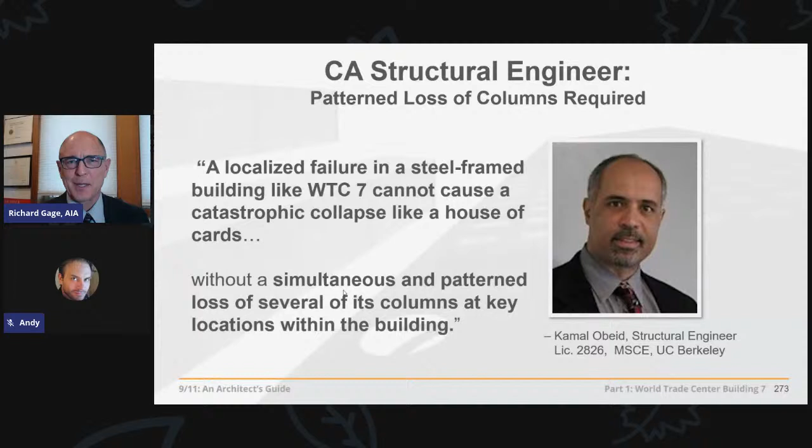One of 100 structural engineers signed on to our petition at AE 9/11 Truth, Kamal Obeid, states: a localized failure in a steel frame building like World Trade Center 7 cannot cause a catastrophic collapse like a house of cards without a simultaneous and patterned loss of several of its columns at key locations within the building. Does fire do that? No.

Prompting also the University of Alaska at Fairbanks to accept the challenge of studying this building's failure.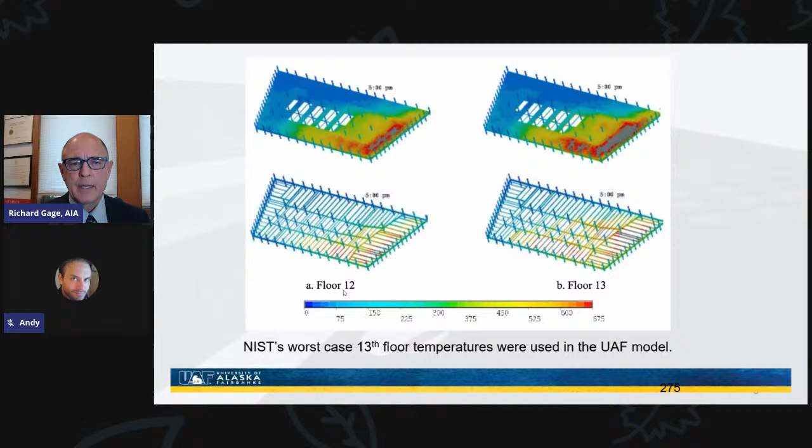Professor Leroy Hulsey, one of the top forensic structural engineers in the country, chairman of their environmental civil engineering, along with his PhD researchers, conducted a very detailed analysis over a period of 4 years. They start out saying, well, gosh, no other steel frame building had ever failed due to fire. We have to understand the failure mechanism here for the public safety.

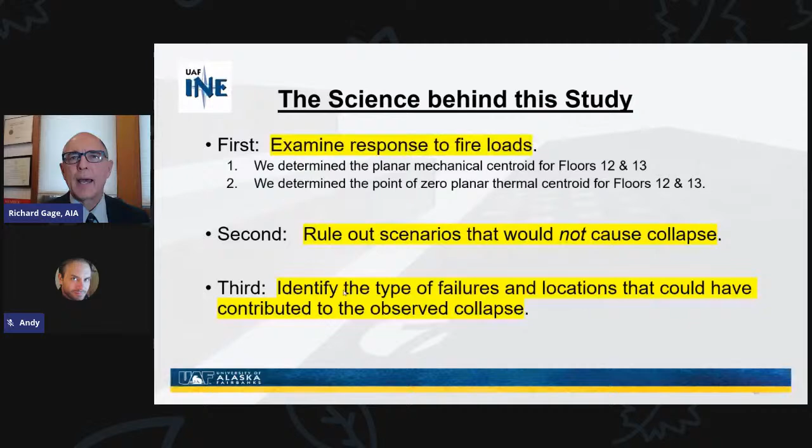Here's what we're going to do: examine the response to the fire loads, rule out scenarios that would not cause the collapse, and identify the type of failures that could have contributed to the collapse. They use the same assumptions that NIST used, proving in the process that most of those assumptions were erroneous. But they wanted to compare apples to apples, so they used NIST's assumptions.

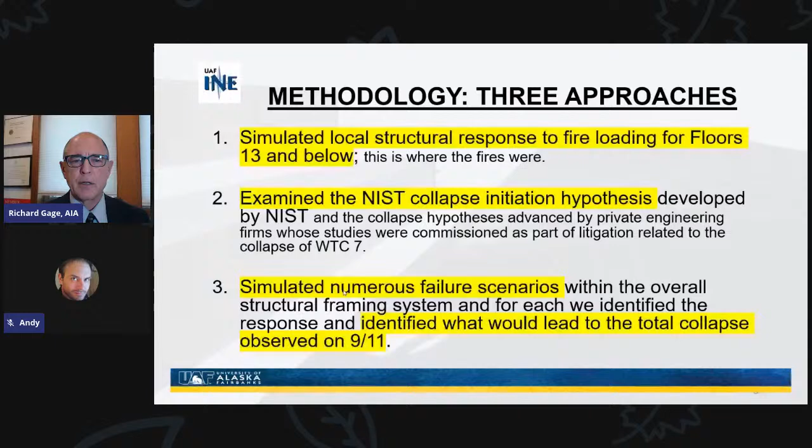The methodology includes 3 approaches: 1, simulate local structural response to fire loading for floors 13 and below, where NIST was focusing. 2, examine the collapse initiation offered by NIST. And 3, simulate numerous failure scenarios to identify how this collapse could have occurred.

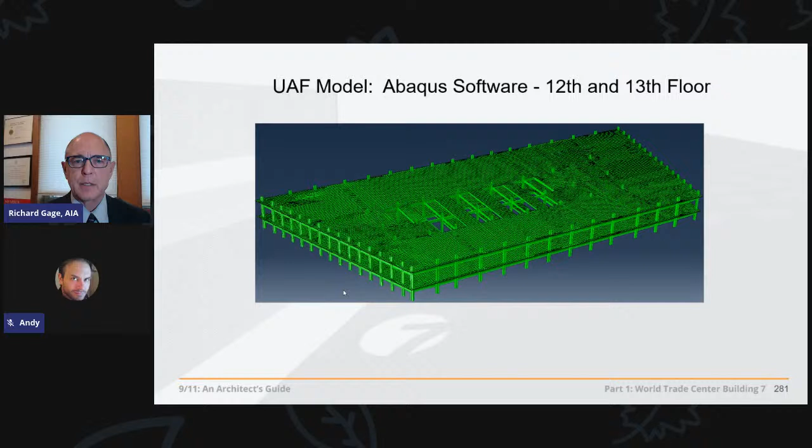They first put all of this in the AutoCAD software program, then used Abaqus software, structural engineering analysis, finite element analysis, to determine what happened, focusing on the area that NIST was focusing on with these long span beams, this girder, and column 79. They analyzed things such as what happens at that connection between the girder and the column.

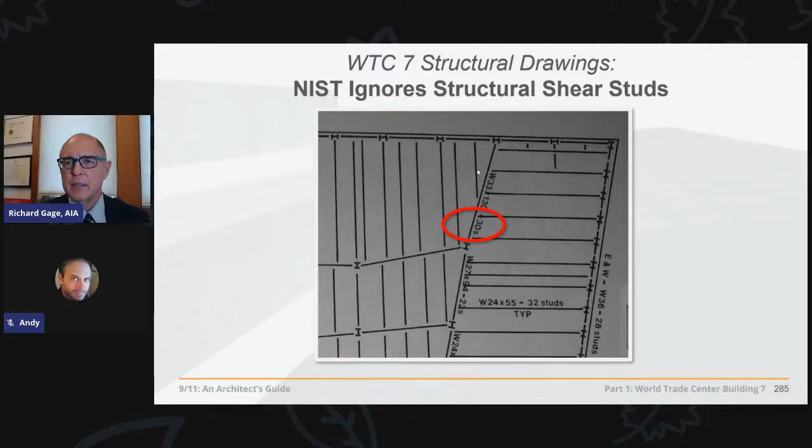They challenge these assumptions in relation to the omitted key structural components that allowed NIST to come up with its faulty conclusions, such as at the east wall, where most of the movement due to the fire would have been outward. The window would have bowed out. Yet they found that NIST assumed infinite stiffness in this wall, not allowing it to move outward, forcing the movement up to 6 inches inward, as you saw us discuss earlier.

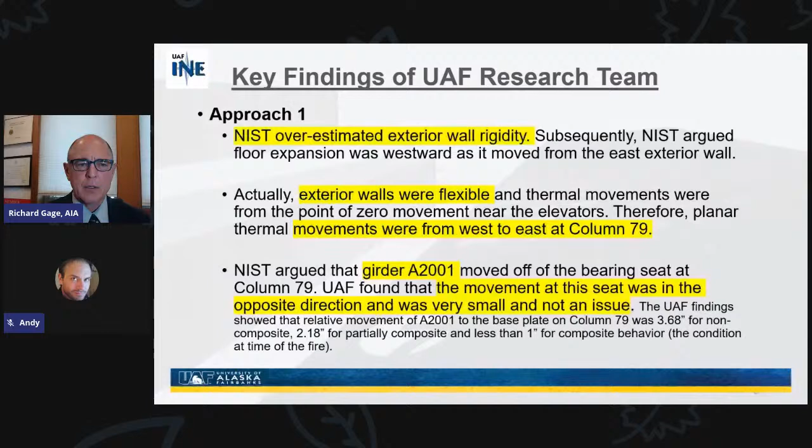So with approach 1, they find that those assumptions and conclusions were clearly wrong on NIST's part, and more of their conclusions were wrong. They find that if indeed columns 79, 80, and 81 did fail, which they could not have failed due to fire, the building would have tipped over, as seen here.

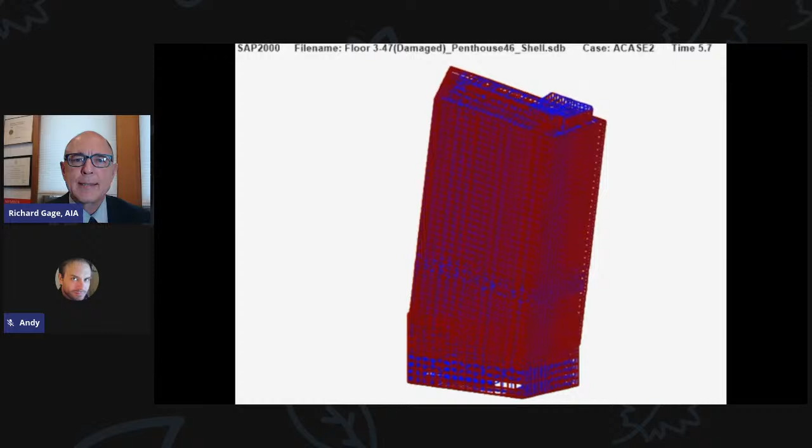Is this going to tip over? It better. Let's try it again. Yeah, so you take out column 79, and guess what? It's on the east side, on the right. It tips over to the right. No big revelation here, right? This is obvious stuff.

So they conclude that the collapse of World Trade Center 7 was a global failure, not a progressive collapse involving the sequential failure of columns throughout the building one by one. In the global failure scenario, the building collapses pretty much straight down, as the videos of the actual collapse show.

So the essential findings are: the fire did not cause the collapse of World Trade Center 7. Temperature was not high enough to cause the weakening of the steel frame. Thermal expansion did not result in a loss of support for the beams and girders. World Trade Center 7 did not experience a progressive collapse, but a global collapse caused by the near simultaneous failure of all the columns in the building.

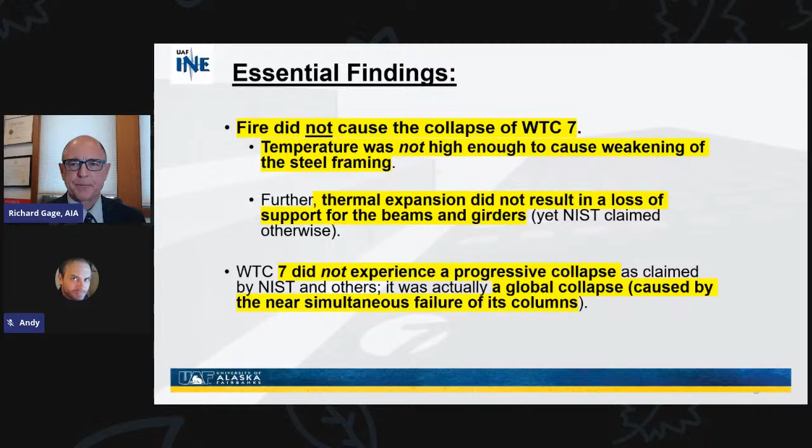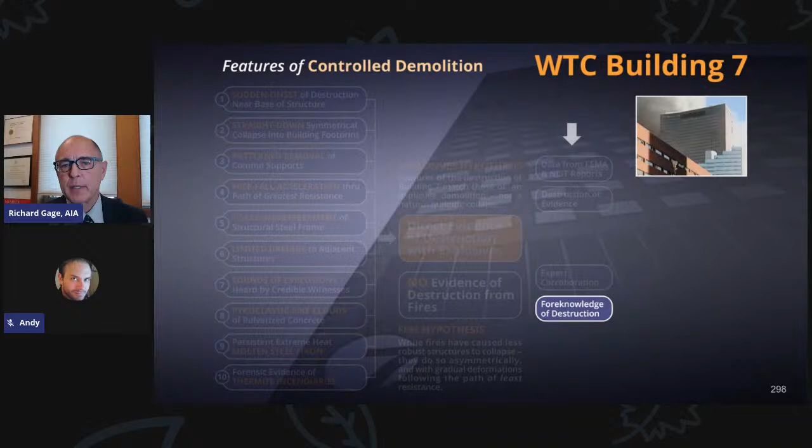We look at one other key feature of a controlled demolition, and that is foreknowledge of the destruction. People know in advance, such as this anonymous engineer who predicts the collapse in 5 hours. If we allow it to burn, the chief asks, how long until we could predict a collapse? He was pretty much right on the money, about 5 hours.

So here is an engineer who has predicted an unprecedented collapse. This building had a few small fires, as you've seen, and yet he's predicting it in advance to the hour when it's never happened before, ever, due to fires alone. The prediction could only have been made with foreknowledge, right? We don't get to know who this engineer is. He doesn't tell us. We would love to talk to that engineer.

We'd love to talk to these guys who are captured on camera walking away from building 7, hearing an explosion over their shoulder, looking back at building 7, looking straight into the CNN camera and saying this.

You hear that? Keep your eye on that building, it'll be coming down. Building is about to blow up. Move it back, all right guys. We are walking back, there's a building about to blow up. Flame, debris coming down. The building is about to blow up, flame and debris coming down.

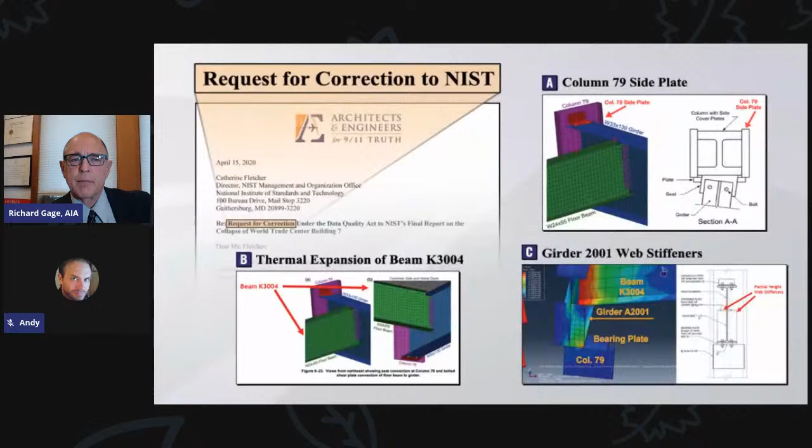We share the results of the Alaska study that I mentioned. Professor Leroy Hulsey has got a 132-page paper, you can download it right from our website and share that with structural engineers. We have taken that material, packaged it, and sent it to NIST, saying here's 8 key points in which we believe you have essentially committed fraud. They have now written back and said no, we're going to stand by our existing study. So we're appealing that, and the results of that appeal will be forthcoming. And if that is unsatisfactory, we will sue them. Speaking of opportunities for a real investigation, here's one.

Andy, tell people about this one.

For years we have asked on the website for people to sign this petition that asks Congress to investigate the destruction of the 3 towers. A couple of years ago, we said, let's do most of the work for them. We wrote the draft legislation. It's called the Bobby McIlvaine World Trade Center Investigation Act, named after Bobby McIlvaine, who tragically died on the morning of September 11th from an explosion. His father has been an advocate for us for many years. What this would do is look into the evidence that Richard has been bringing to you every week since 2007.

The legislation is written in such a way that it would create a select committee that has to look into this possibility, not just bring members of NIST out in front of Congress to regurgitate some talking points, but actually look at the evidence we've been bringing to the forefront for years.

But as we've learned through years of activism, members of Congress don't do things they'd rather not do unless they hear from their constituents. So that is where you get involved.

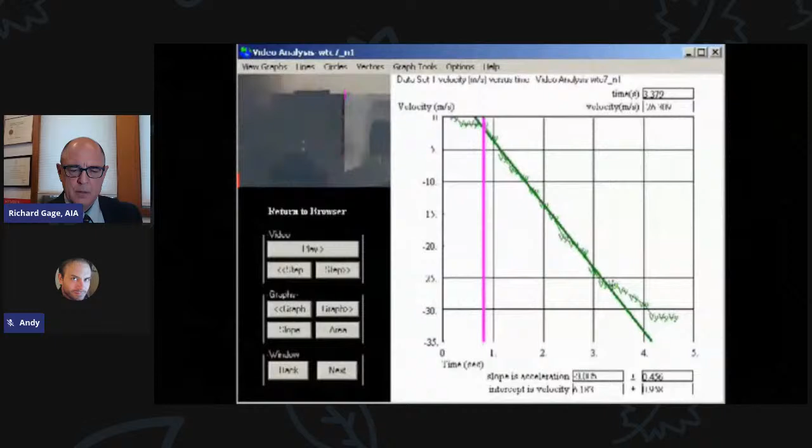The report, issued by the National Institute of Standards and Technology, referred to as NIST, was not valid science. They're talking about a single column collapse or failure that resulted in a total collapse of the building. Building 7 descended in free fall for the first 100 feet, meaning there was absolutely no resistance to the descent whatsoever. So all of the columns needed to be severed at the same time.

The symmetry is the smoking gun. NIST has admitted it went into free fall for 8 stories. You don't need to be an engineer or an architect to see what happened to those buildings.

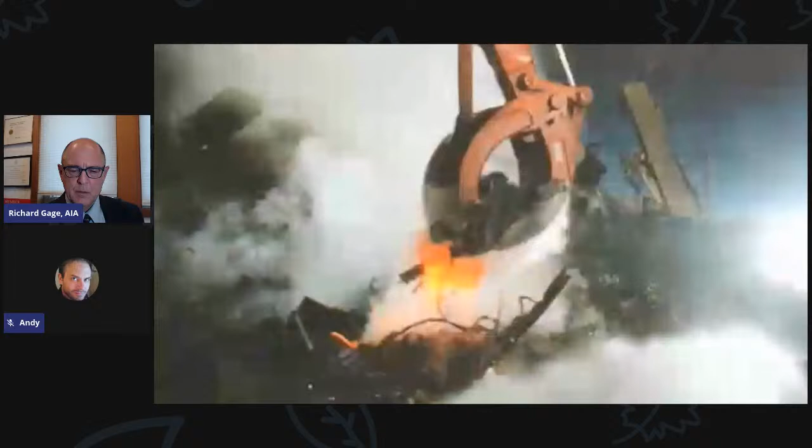In an office fire, you cannot generate enough heat to melt steel. There were these iron microspheres present in all of the dust samples. They needed to have been formed in extremely high temperatures.

All the characteristics of the microspheres, along with what I see in the attack of the beams that were actually found, tell me that thermite was involved. In the dust, what we have found is a modern version of thermite, which we call nanothermite.

NIST concedes that they found no evidence for explosives. So then we asked them, well, did you look? And they said, no, we did not look for explosives or residues of explosives. And in fact, the evidence is overwhelming that these red-gray chips are very high-temperature incendiaries.

We have watched as scientific integrity has been undermined and scientific research politicized in an effort to advance predetermined ideological agendas. If this is a crime, I think everybody agrees it's a crime. Evidence was removed from the scene of the crime. You can't do science when you are deprived of the evidence and when your hypothesis is the least likely instead of the most likely—when the most likely hypothesis in the case of Building 7 wasn't even mentioned. This is not science.